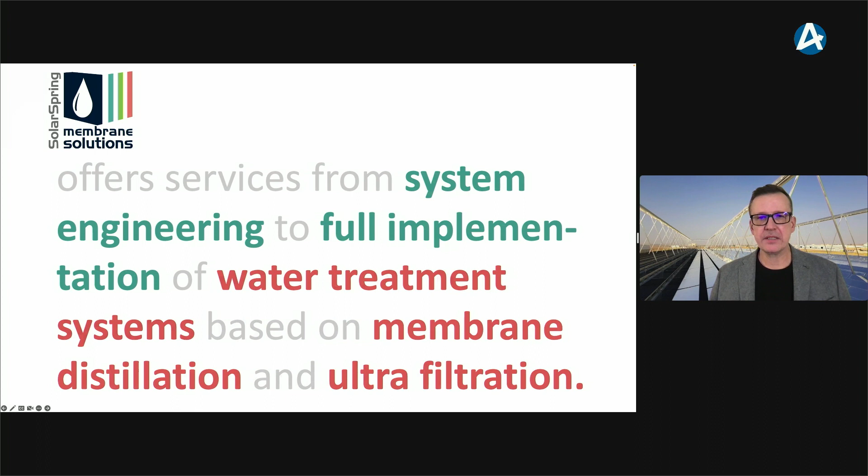So here we have the overview, the scope of services of both companies as a group, and there are also very strong synergies. The scope ranges from consulting services concerning CO2 reduction, efficiency measures, and energy optimization. We do engineering - we come up with concepts, we plan, we do detailed engineering for district heating, but also process heating. This is a very important topic for us, but also for cooling, heating, and direct steam generation in industry.

When it comes to power generation, we offer photovoltaic - not only regular flat PV modules, but also other technologies, for example a photovoltaic fence, more about this later. When you have heating, you also often have cooling, especially in industry, so we try to cover the full energy demand of customers in terms of electricity, heat, and cold. We have a holistic approach.

Last but not least, process water treatment with the technologies of SolarSpring. This means also resource recovery - very often industry has valuable resources in their wastewater streams.

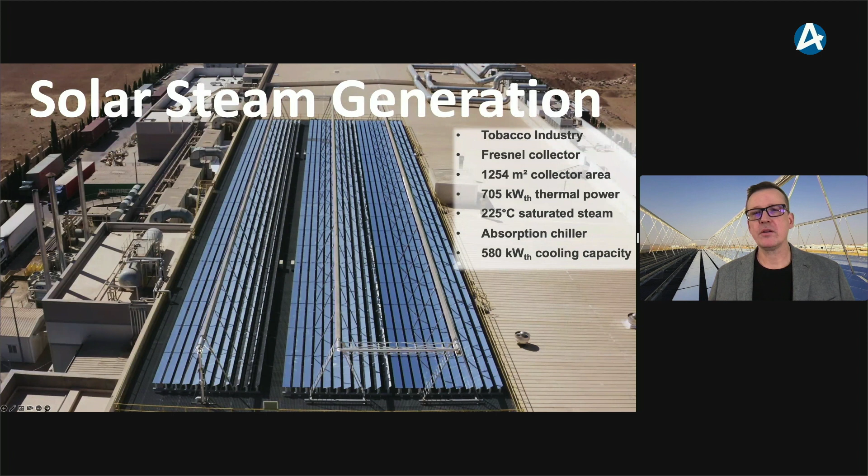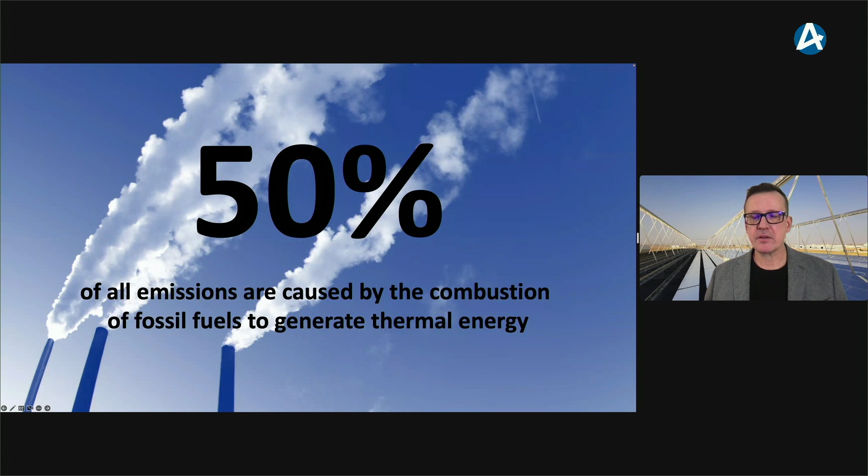So why are we doing this? What is the motivation behind that? You have to be aware that about 50% of emissions are caused by the combustion of fossil fuel to generate thermal energy, to generate heat. We burn oil, gas, or coal to heat up something - not only our apartments or houses, but there are many processes in industry that need heat. And 30% of all emissions are caused by industry. Industry is the most difficult customer. I don't want to blame anybody personally here, but it's going rather slow. It's more about communication to the customers - everybody says they're already green, but it's going rather slow.

This is why we think it's a very good combination, the business models and technologies of these two companies, Industrial Solar and SolarSpring: 80% of all companies that use heat also use water in the process. Membrane distillation is a thermally driven process, so it needs heat as a driving power. And industry needs a lot of heat and water.

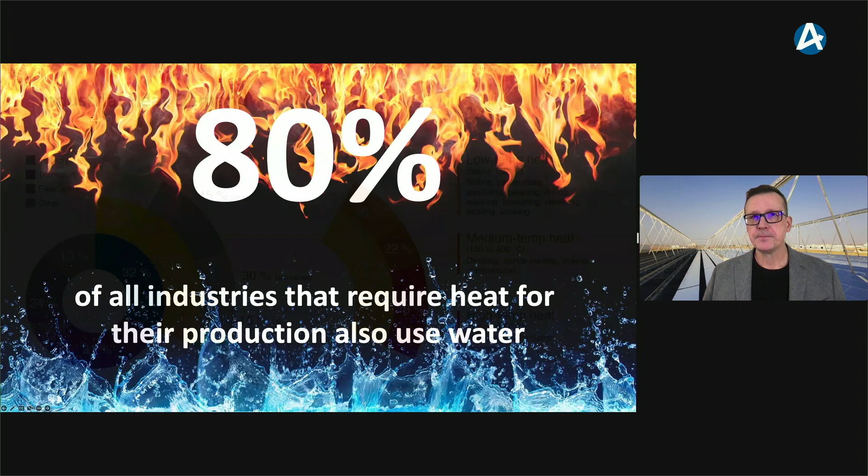Let's have a closer look at this heat demand in industry. Here you see a pie chart showing the share of industry, about 32%, and how it's currently covered, or in what form this energy is required. Only one fourth is electric energy, and 74% is required as thermal energy. This graph is not from 2022, but it's not too old.

You see here that almost half of the heat is generated with coal. This is surely not in Sweden, but if you look at countries like Australia, South Africa, or Indonesia, India, it's common practice to have coal-fired boilers. Here in Europe, it's mainly natural gas, which is now very expensive due to the crisis or the war in Ukraine, and oil, which isn't really cheap anymore either, and a little bit of renewables.

When you look at the temperature distribution, industry needs some warm water or heat below 150 degrees C - that's about a third. Another 22% is in the medium temperature range up to 400. The upper half is temperatures above 400, that's glass and metal and other processes. Industrial Solar, our subsidiary, is addressing the lower half up to 400 degrees C.

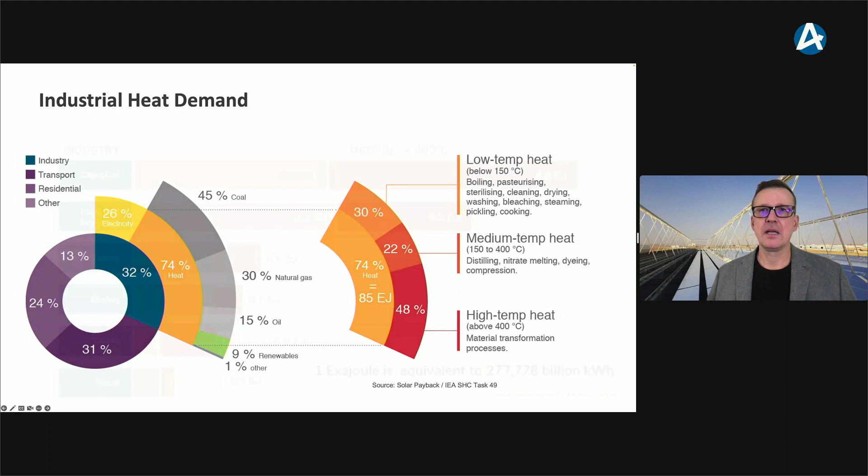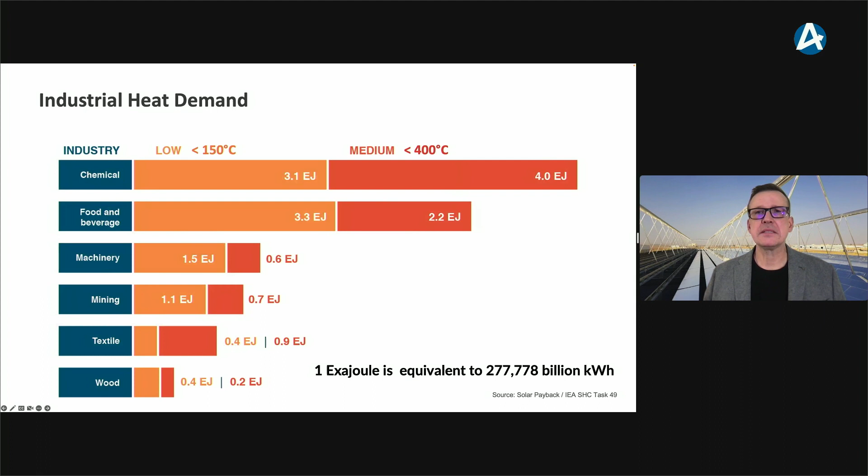Here you have some industries that are using heat. This is no surprise - chemical industry, food and beverage. There are plenty of examples you can think of in the food and beverage industry that use heat to drive their processes, but also other processes like machinery, mining, and so on.

And where is this all happening? This is also an interesting fact which I've shown before, but I show it again to make people aware of it. If you look at OECD countries and non-OECD countries, the emerging markets, and where growth is expected in the next couple of years and decades, it's not going to happen in the rich OECD countries like Europe or North America.

It's going to happen in emerging markets like China, India, Africa, and Latin America. This is due to the fact that we don't have a growing population in OECD countries, and we have very good efficiency measures in industry - we're saving energy, especially when it's expensive, which works quite well now due to high prices. The growth of population and industry is going to happen in these emerging markets. It's also clearly visible that those countries and regions are quite sunny, most of them very sunny, so it's absolutely feasible to use solar energy for industry there.

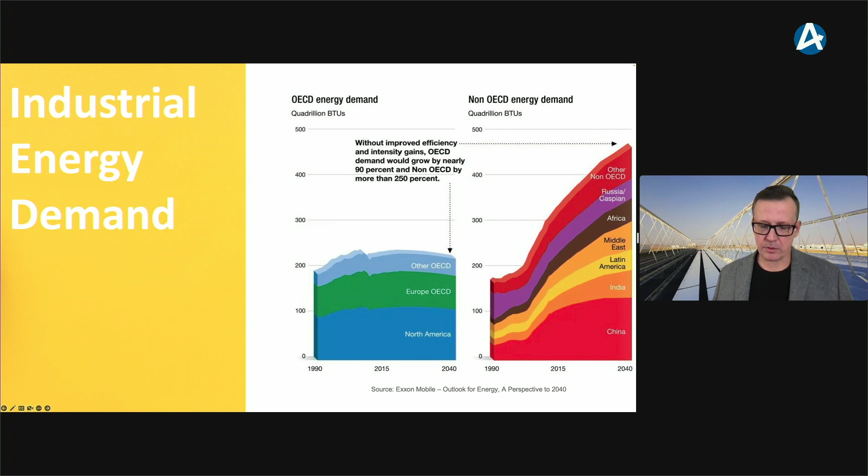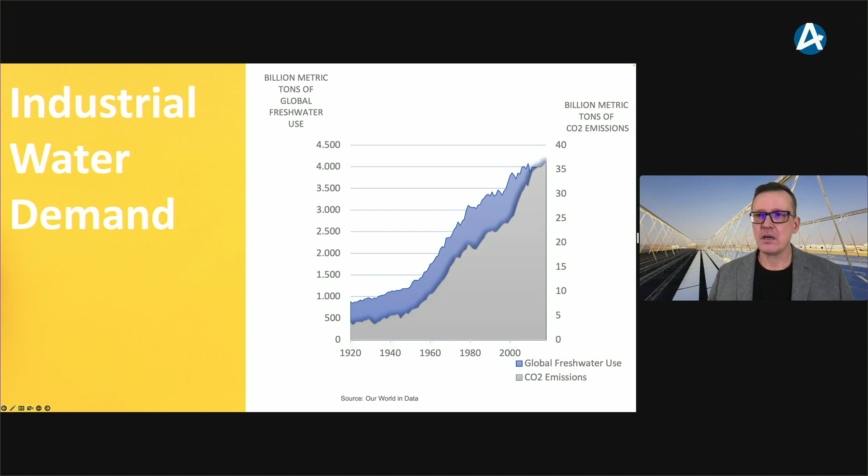What technologies are we using in our systems, in our projects? We have this in-house technology, this concentrating solar thermal system, the so-called Fresnel collector, a linear concentrating system that can generate temperatures up to 400 degrees C, that can generate steam. And this we are complementing with other technologies like photovoltaic modules, regular solar thermal, non-concentrating solar thermal to generate temperatures up to 100 degrees C, roughly.

But also different types of storages, electric storages, also heat pumps. So we do basically the sector coupling in our projects, heat and cold combination, converting electricity to heat. This can be done with heat pumps, and this heat can be stored in heat storages. We can also use the brute force method for high temperatures, that's electric resistance heating for temperatures in a range that heat pumps cannot reach.

And then this is complemented by the water treatment and the cooling technologies like compression, absorption chillers, and storages for cold. This is quite a portfolio, but it goes very well together. And this is typically what customers require when they want to become carbon neutral or when they significantly want to reduce their emissions.

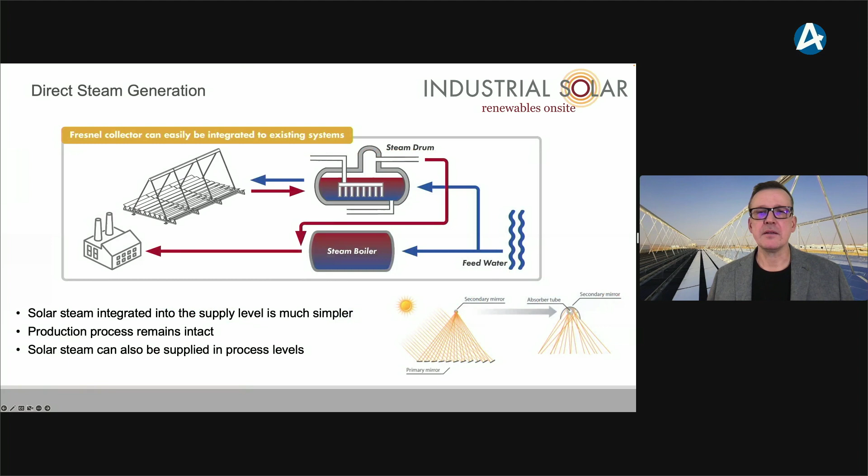It's big enough to meet energy demand in industry, but it's still small enough to be installed on these large flat rooftops. Direct steam generation mentioned before, it's very nice to integrate. Basically, we need a valve and connect to the steam header of the company that operates a regular steam boiler, and we inject steam and keep the pressure in the system, and the burner doesn't fire fossil fuel. As simple as that.

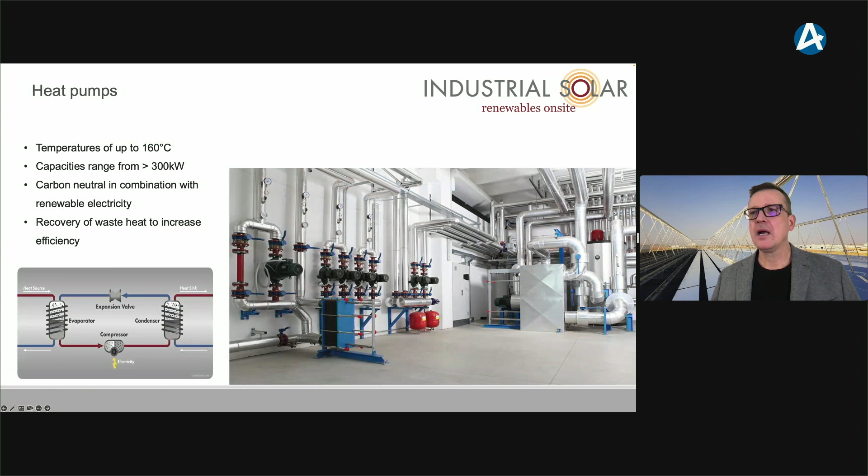Heat pumps, already briefly mentioned, are a very interesting technology to convert electricity to heat with good COPs, good efficiencies. There are more and more manufacturers of heat pumps offering systems for industry that can also achieve higher temperatures. This is also part of our systems.

Now coming to our other subsidiary, SolarSpring. As said before, their main technology is membrane distillation. This is a thermally driven system. You can compare it to your outdoor jacket, to Gore-Tex, Sympatex. You have the hot feed solution, and the water evaporates through the membrane, then there's a condensation surface behind, which is cooled, and there the water condenses.

It can be very easily operated with waste heat, for example. It's very robust, and you can concentrate to higher concentrations on this side of the membrane, which makes it interesting for concentration of valuable components or for zero liquid discharge systems.

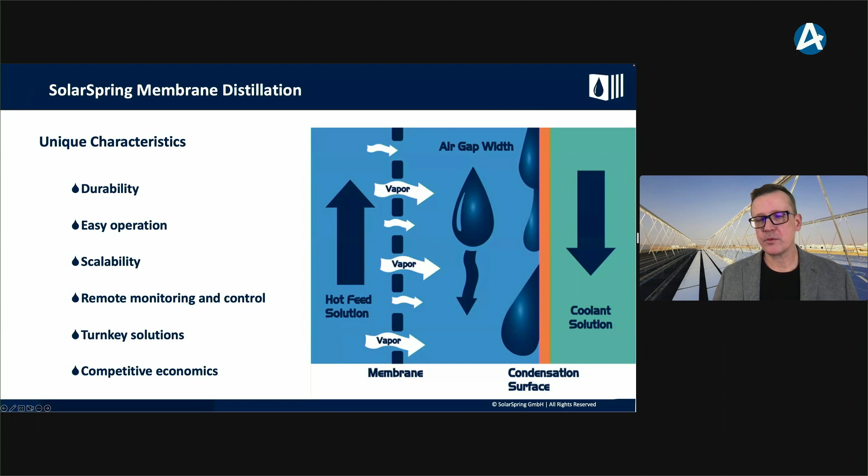What are the applications? Some examples: metal industry, galvanization, recycling of acids in metal industry, but also brine treatment. A lot of wastewater in industry is contaminated with salt. Water desalination with reverse osmosis.

It's not always possible to dump the concentrated salt water back in the sea or in the ground. So with membrane distillation, you can concentrate the salt to much higher concentrations, and you can even design zero liquid discharge systems. It's possible to remove ammonia from wastewater, from a sewage water treatment system.

Ammonia is a problem for our rivers and lakes, and at the same time it's a fertilizer, so it's a win-win situation. It can also be applied, the technology, for fracking, for example, for cleaning the water.

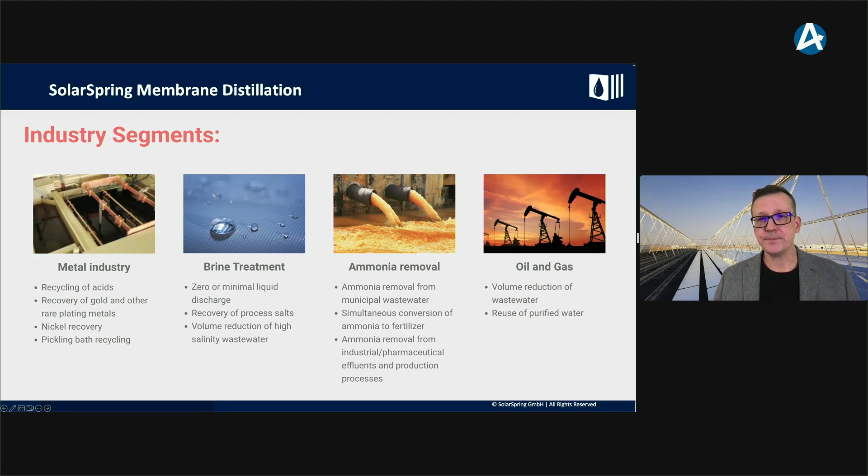The most interesting, I think, now is the latest development. Hydrogen is a very important component to decarbonize industry. It should replace, in the long run, natural gas. And it's very attractive to generate hydrogen close to a renewable electric power source, for example offshore wind parks.

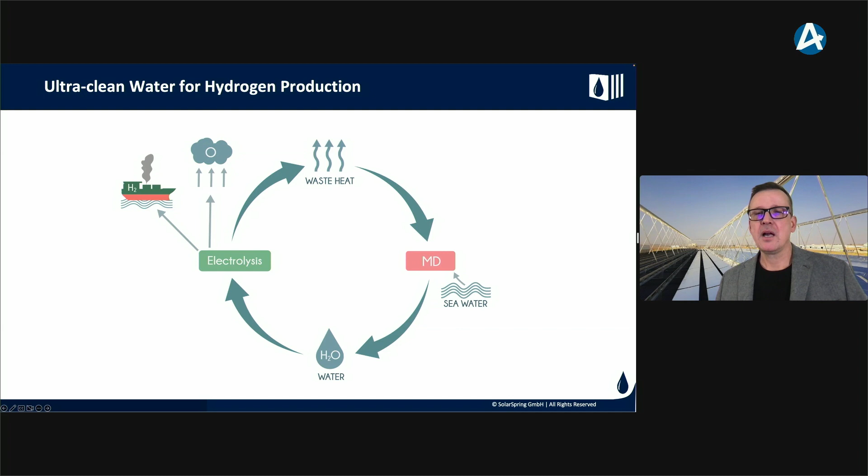For electrolysis, you do need electricity and ultra clean water. And the electrolysis generates waste heat. This waste heat can be used for membrane distillation for the production of ultra clean water. So this increases the efficiency of hydrogen production and lowers the cost.

There is a huge demand now for green tech solutions due to the climate crisis, but also due to the war in Ukraine. Fossil fuel is suddenly very expensive, and we don't want to be dependent on fossil fuel anymore, whether it comes from Russia or other countries. We should improve our independency and use more renewable fuels. And there are new regulations and guidelines on the way from which we will profit, because it's obligatory to use renewable energies, and this is helping us.

So we are very well positioned, and we offer good solutions for our customers. Thank you, that's it. Thank you, and looking forward to your questions.

Thank you so much, Christian. I remember you were saying previously that you were not content with the size of your orders. You say now that there are many in number, but have they developed in the right direction in terms of their sizes?

Yes, I mean, the larger the project, the longer the discussion, negotiation, preparation. You can get smaller orders rather quickly, but if a company has to invest a couple of million euros, then it takes long. And as I said before, industry is more difficult than private customers. Private customers have an emotional component in their decision-making process, and industry basically, or mostly, looks at the financial figures.